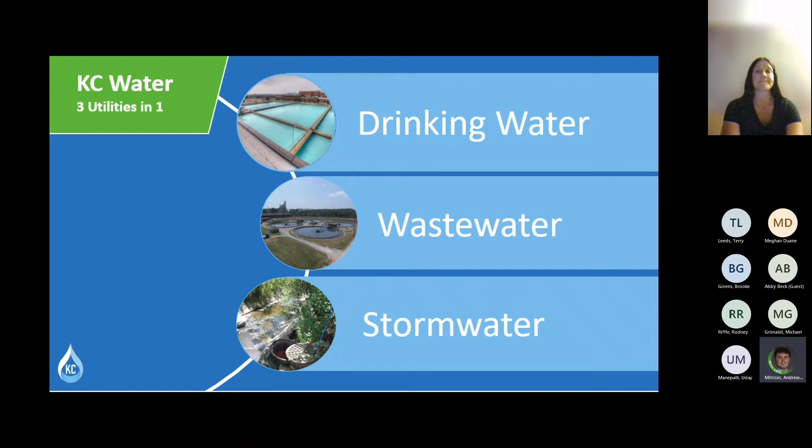We have 2 types of service areas in our system. What we refer to as the combined sewer system, which is in the older part in the core of the city, and then we have separate sewer systems. They are more in the outlying areas, both north of the river and further south of the combined sewer area. In essence, the sewers in the combined part date back to 1857. Yeah, that's 1857, a long time ago. So we have a very old system.

Within that shaded area you see on the screen is about 58 square miles that has more than 1,000 miles of pipe that convey water. I'll explain what combined means and what separate means. In the separate areas, shown as light green shaded areas, if we add it all up, that's about 260 square miles, with about 1,800 miles of pipe there. Typically the older parts are built on a combined system, and the relatively newer systems built from the 1960s onwards are separate sewer systems.

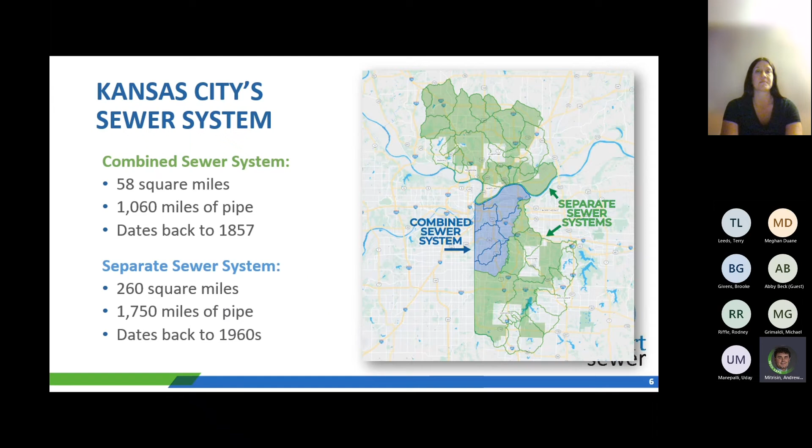To give you some understanding, in a combined sewer system we have one set of pipe that collects wastewater from our homes, institutions, and so on. But that same pipe also collects rainfall runoff when it rains. Those two sources of water combine in the same pipe, and those pipes are ultimately supposed to take all the flow to the wastewater treatment plant. During dry conditions, the collected wastewater is conveyed downstream to a wastewater treatment plant and treated and safely discharged back to the waterways.

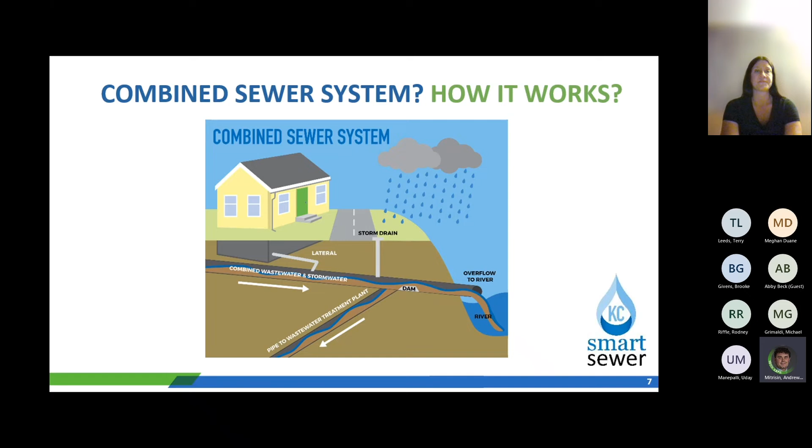But when it rains, most of that combined mixture of sanitary flow and rainwater overflows into the area waterways. That is a pollution concern. That's how combined systems work, that's how they're designed. Way back when, our elders thought that building one pipe would solve the problems, but later we found that's not the case because of the pollution concerns on the water bodies, which in turn downstream affects the intakes for our water treatment plants.

In the separate system, we have two sets of pipes: one for wastewater that conveys it to the wastewater treatment plants for treatment and discharge, and a separate pipe that collects only rainwater runoff and discharges to the waterways.

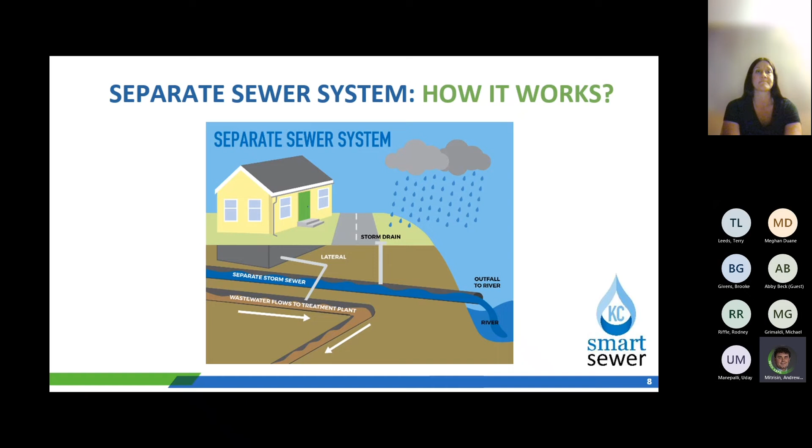That has its own set of challenges, but where we are in this project area, we're in the combined system, meaning we have one common pipe that takes water and wastewater. When it rains, we have a mixture of wastewater and stormwater conveyed to receiving streams. That is what's driving some of the concerns for these projects.

Now talking about concerns and challenges, we do have a number of challenges. As I mentioned, when it rains, our system overflows from the combined system to the area waterways without any treatment. That is a direct pollution concern, and a water quality and public health concern.

As I mentioned before, we have sewers dating back to 1857, even some dating back to the 1960s. We have aged or aging wastewater infrastructure which needs attention in terms of improving their condition and managing their useful life. And of course, when the sewers are loaded during rainfall conditions, they tend to back up, and these backups could be to homes, other properties, or sometimes to the surface, to the street. That is not a good thing.

Also, when these sewer overflows occur to the area waterways, that pollutes the local streams, lakes, and rivers. Another non-technical challenge is that while our sewer system is very old, the historical sewer rates did not reflect the true cost of managing these systems, inspecting them, and fixing any issues with their condition. So the lower rates historically did not produce enough resources to fix our system. That is another major challenge we have.

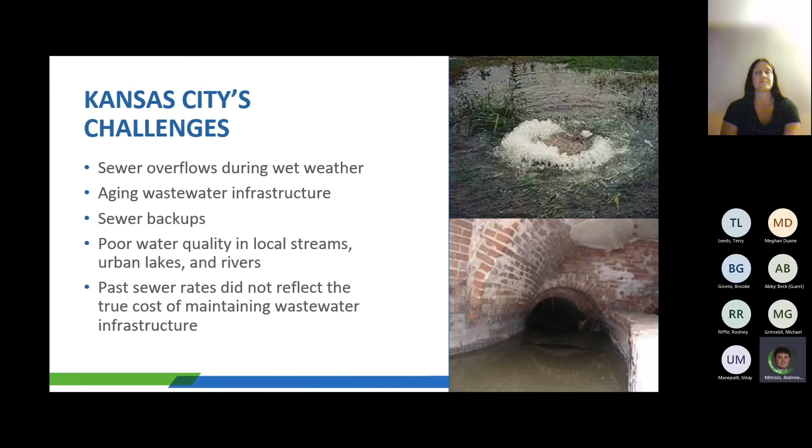Now, we're not alone. There are about 800 plus other communities around the United States that have combined systems. They have very similar problems, dealing with very similar challenges and programs like we are currently administering. So we're among many, but we have our own unique challenges as well.

Now, because of those challenges and pollution concerns, we do have permits for our systems. We need to be safely collecting wastewater and discharging it, and there are state regulations we need to comply with under the permits. Obviously, because of the sewer overflows and water quality concerns, there was a requirement for us to fix our sewers as a result of the Clean Water Act, back in the early 70s. That drives a lot of our system improvement needs.

And because of the long-standing gap in attending to these sewer system improvement needs and lack of adequate response, regulatory agencies came to us and worked with us, and we have a federally mandated program to fix our sewer system problems. We call this a consent decree, currently in place, which requires us to address sewer overflows.

As we speak, we have a recent consent decree negotiated with the EPA, which was originally signed in 2010, but in early 2021 we have an amendment to it. Essentially we have a new consent decree, which now gives us a path forward for our programs through 2040.

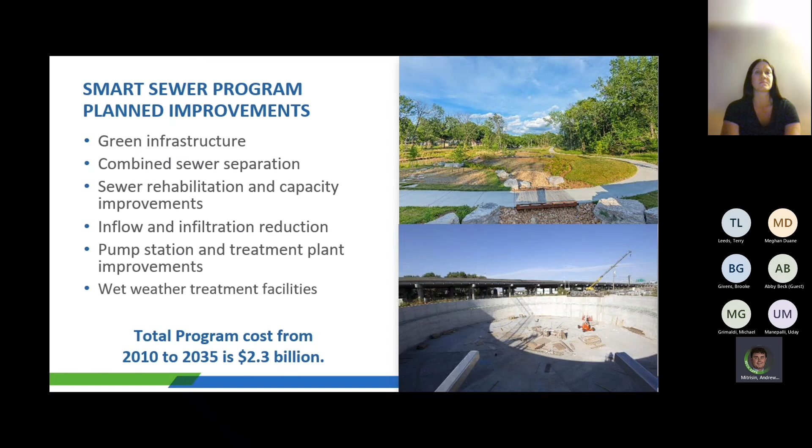Sewer separation in the Outfall 54 area is one project of many that we're designing and building throughout the system. As I mentioned before, sewer separation takes the combined system we have in the Outfall 54 area and creates two separate systems to lessen the burden on the combined system and reduce overflows at Outfall 54, providing the level of protection we need from a water quality point of view.

We have our project team here today who could walk you through this, but we've met with our stakeholder groups more than 8 times in the past as we conceive and develop the designs. Some of you may already have this information, but for those listening for the first time, we wanted to give you the proper context to this project.

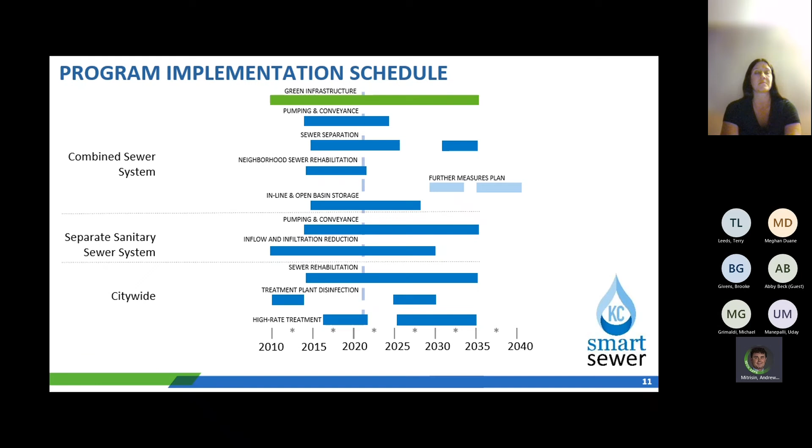Now I would like to ask Priya Iyengar to come in. She's our project manager for this. She'll provide more details on the sewer separation Outfall 54 project. Priya?

Good evening, everybody. I'm Priya Iyengar. I work with KC Water. I'll provide a general overview of the project, and then I'll hand it over to Chad to give you more details on the project elements that we have planned for.

Thank you, Cindy, for that overview on all the challenges we're facing. I want to share that this project, Sewer Separation Outfall 54, is one of the many projects that is underway to address all those challenges you heard a few minutes ago.

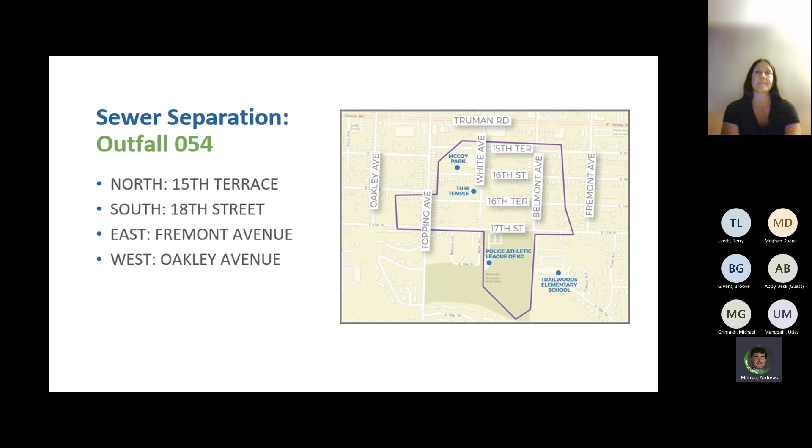The improvements we're planning to implement as part of this project include rehabilitation of the existing sewer system, the 9,000 linear feet of it. As a project team, we were able to investigate those pipes by sending cameras into the sewers to understand if the pipes are deteriorated and need fixing. Based on that evaluation, we've proposed a rehabilitation of this entire sewer system.

We're proposing new stormwater collection. As Srini mentioned earlier, our strategy is to divert the stormwater that's getting into the combined sewer right now and collect it in a separate pipe, discharging it to the creek with some sort of treatment.

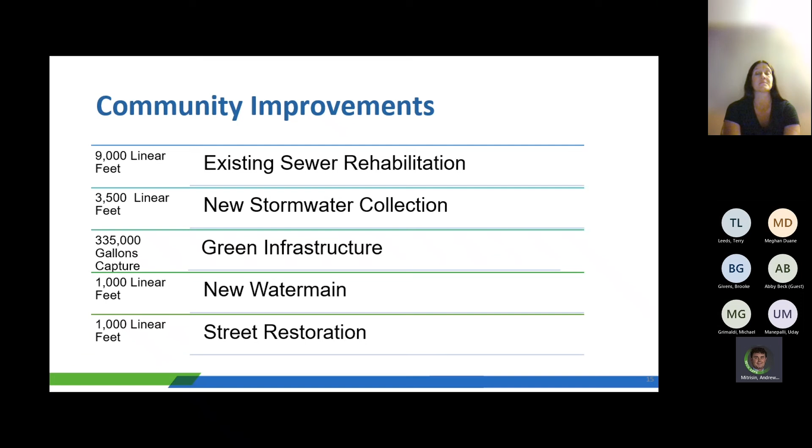I want to touch a little bit on the timeline of the project. Right now, our designs, the plans that we have brought here today, are at 90% design, so we're almost close to final design. We anticipate having all our construction documents ready by February of next year. And once the construction documents are ready, we will be bidding to solicit a lowest and best bidder construction contractor.

That's about 4 to 5 months, and following that, we'll start construction. So anticipate construction within the community next summer, and that should take us about a year to finish. Once construction's finished, we'll go through a maintenance phase for green infrastructure, both subsurface and on the surface.

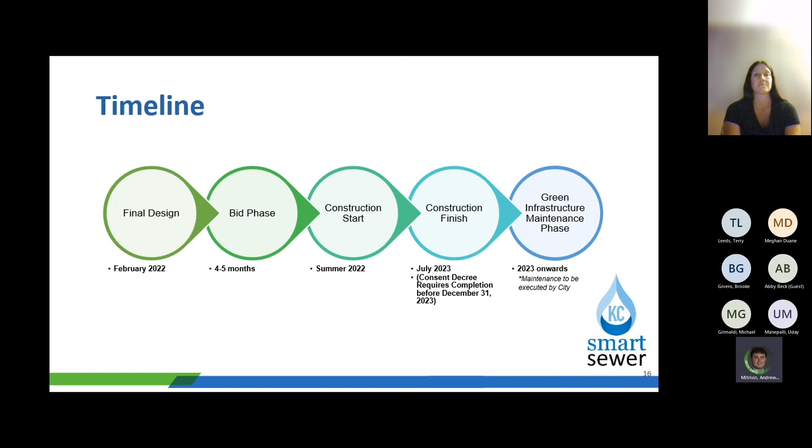One question we always get asked is who will maintain green infrastructure. We'd like to say that yes, the city will maintain what we build. So once the green infrastructure is built, the city will be maintaining it.

As Srini mentioned briefly, we also did some stakeholder engagement during the design phase. In the past few months, our first public meeting on the project, before we started preliminary design, was in April of this year. We met with the Blue Valley Neighborhood Association, McCoy Park Association, Trailwoods Elementary, Police Athletic League, and other neighborhood residents.

And at this point, I'll let Chad talk about the project.

I think we just lost our microphone, so the sound may be a little bit different here. Chad Johnson, I'm with CDM Smith. I'm the technical lead for this project. Trying to gather the information we have and then make this a community amenity for years and years to come. What's up on the screen there?

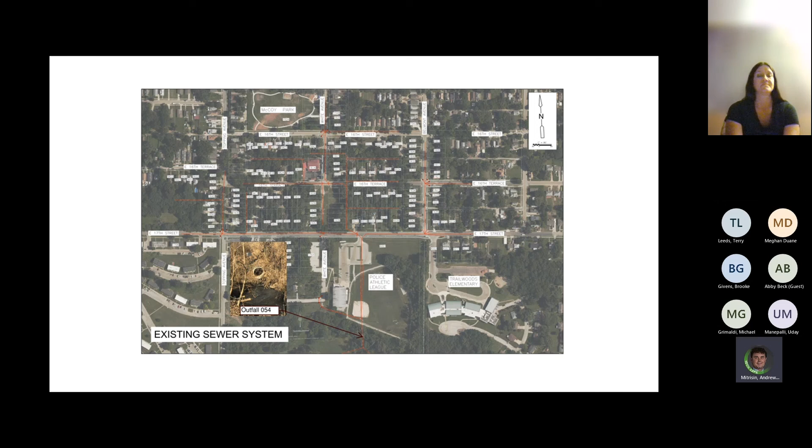So as we look through here, I'm first going to go over what's going to happen underground, and then I'll finish with what the public and everybody will see above ground. As engineers, a lot of what we do is out of sight of the public once the project's done. We do recognize that construction is always kind of a pain when it's going through, and we're putting provisions in to make sure residents have access to their houses, but there are improvements that need to be done.

Taking a look at construction methods here, the majority of the pipe, close to 7,500 feet within this area, will be lined, meaning we don't have to dig up the pipe, but we send a liner through it and cure it, essentially refreshing the pipe as a new one but without surface disturbance. So all of the work in between houses and in backyards will be this lining where we don't have to dig it up.

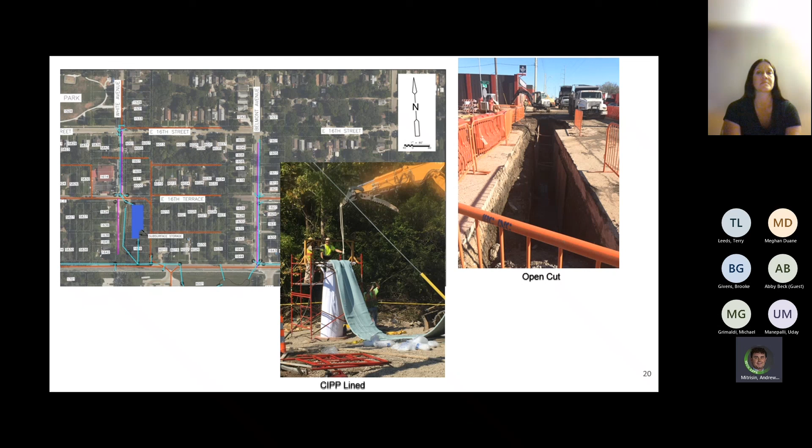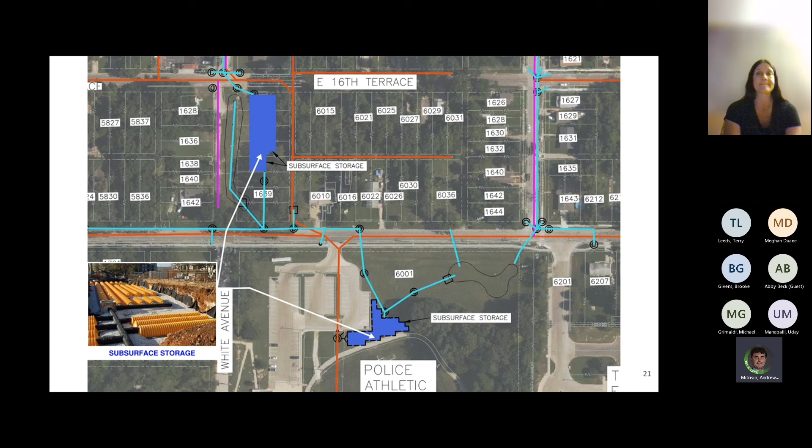We are also installing some green infrastructure that will be underground. This is a place to temporarily store the stormwater as it comes in under the surface, allowing it to evaporate and infiltrate into the soil. We anticipate these systems will typically have gravel as well as some pipes or half pipes. In the picture on the lower left, plastic half pipes are put in to create void space underground, and then on top goes either pavement or grass, whatever's currently there. You'll see here in a minute what we're going to have on the surface.

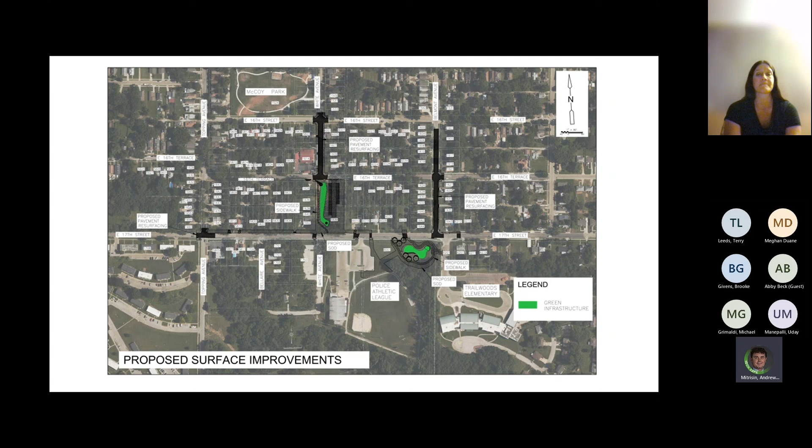As we look at surface improvements, once we've done the underground work, we're restoring everything again. Where pavement has been disturbed, it will be put back. On Belmont and White, where we do the open cut of the pipeline, the streets will be restored to a new condition, redoing curb and gutters. There are inlets where stormwater currently goes from the surface down underground - we will repair and replace all of those and connect them to the new stormwater pipes going in. Wherever there's grass currently, we'll bring the contractor onto the team, and that contractor will restore all that sod in other areas.

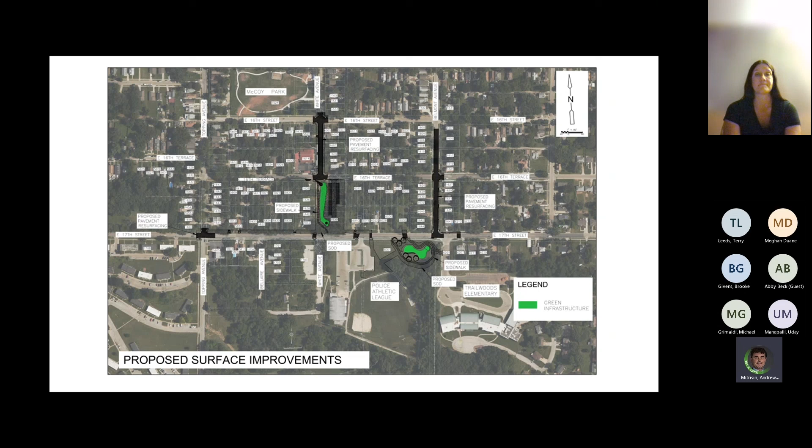There are a couple places in green, which is green infrastructure that will be at the surface and noticeable for the community as we go through. In these locations, water will temporarily pond up right after a storm, infiltrate, evaporate, and make its way downstream - somewhat similar to what nature used before we developed this area. As we put in this green infrastructure, it's intended to help mimic those natural processes. We aren't perfect in mimicking nature, but we've come a long way.

There will be a new parking lot in that area, and those permeable pavers sit above the subsurface gravel - that's how we get water from the surface down through. Permeable means water can actually go through the pavement, which is very cool to watch. Once it's in, it'll be something interesting to go out and look at. That water goes through the permeable pavers and is stored down in the gravel to either infiltrate into the ground, evaporate, or be temporarily stored there.

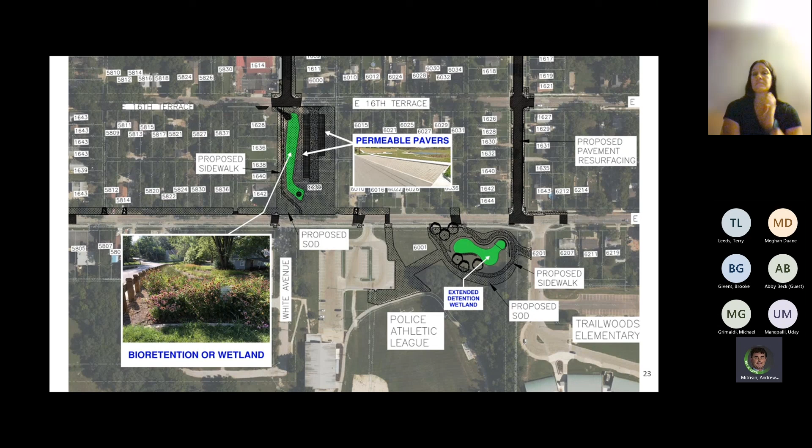And I will go ahead and turn it back over to Drew.